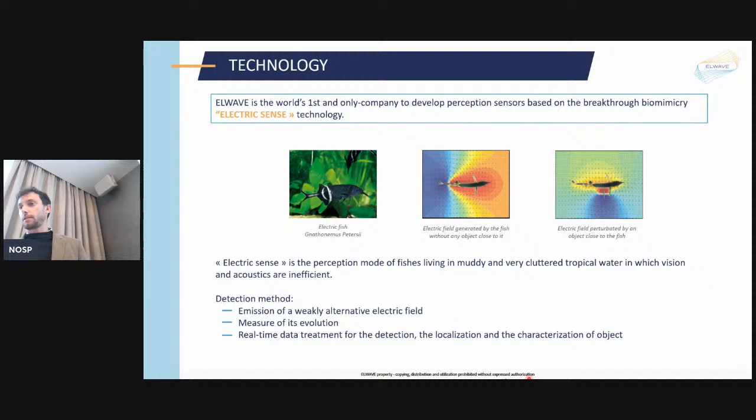So about the architecture of the product, how we are going to deploy it. I will show you the hardware and the software or algorithms that can do different things with the same hardware.

In terms of hardware, we have a first version, a 300 meter depth rating system that's going to be launched after summer. It's made of a pod with all the electronics and real-time processing of the signal, and some electrodes, up to 8 electrodes.

You see that the systems are quite compact and light, and really modular. You can put between 2 and 8 electrodes, depending on what you want to do. Here you have 3 connectors for serial, Ethernet, and external sensor connection.

Part of the important external sensors are conductivity temperature probes, because we compensate for variation of the environment. What we want to see is a variation of our signal due to a new object, not due to a change of the seawater salinity, for instance.

And on the other side, you have 8 subcon connectors to plug in your electrodes.

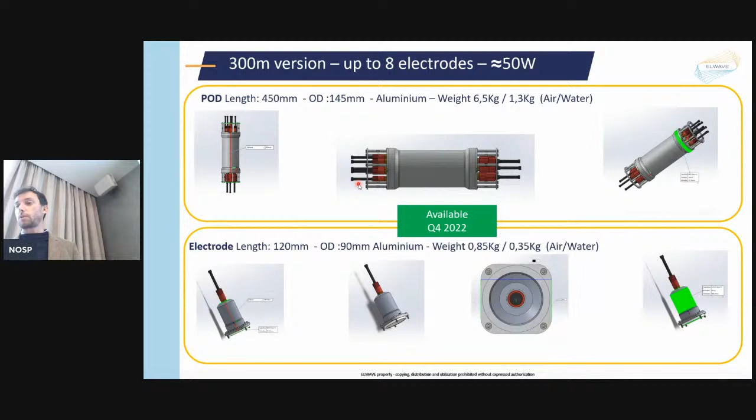A little bit later, we're going to launch also a 6,000 meter version. It's exactly the same electronics inside. We just changed the titanium housing and the connectors. Here you don't have 8 plugs, but 2 big plugs to connect 2 octopuses, so 2 times 8 electrodes, up to 16 electrodes to your hardware.

Software modules. The first one is what we call the safety shield. I was mentioning that it could be a complementary solution to your sonar or obstacle avoidance sonar.

The sonar is directional, the camera is directional. Sonar has a longer range than us, and the camera has more resolution, but we can provide omnidirectional detection, we make the bubble like the fish. So we provide an omnidirectional and instantaneous detection of the closed environment.

Just to give you an idea of the detection range, it depends on the spacing between the electrodes. So if I'm on an AUV of 5 meters long, the radius of the detection bubble in the water is 25 meters.

And this detection range will tend to reduce a little bit when it's inside the marine sediment. When you go closer to the seabed, you will see what is inside the seabed. But the main limitation of the technology is the detection range. We have designed the product to be compact and low power consumption, so you have no perfect sensor, it's just a compromise.

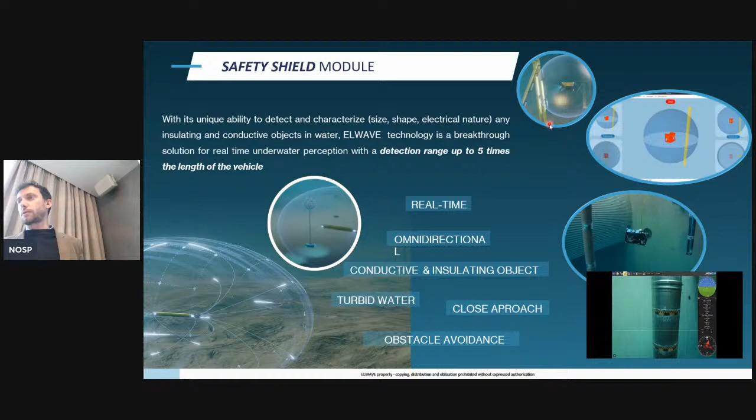Two other modules, so all these modules are software with algorithms in the background. Algorithms run in the pod, in the bottle, in real time. And afterward you have software on your own PC where you can visualize and configure your software and visualize the data.

One software will be deployed first for UXO. Basically, we'll do a resistivity chart. It's like a waterfall image from a side scan, same principle, but a resistivity chart. So you will be able to see insulated and conductive objects appearing on the chart.

If you compare that to magnetometers, they can only see ferrous targets. We don't care about the ferrous equivalent. We see any target which has a conductivity different than the environment.

So for us, the only object we will not see is one that has the same conductivity as the marine sediment or sand, if it's in the sand, or the same conductivity as the water, if it's in the water. That would be transparent. Otherwise, we'll see a gradient of color.

We'll have an upgrade of this module called UXO 2D, and then UXO 3D. If people want the size, shape, and depth of burial of the object, it will be possible. For the shape, it will be approximative. We develop models of the electric response of a sphere, a cylinder, an ellipsoid, a plane. That will help identify what type of mine or UXO is inside, and also give the conductivity. So for buried object identification, that will be very helpful.

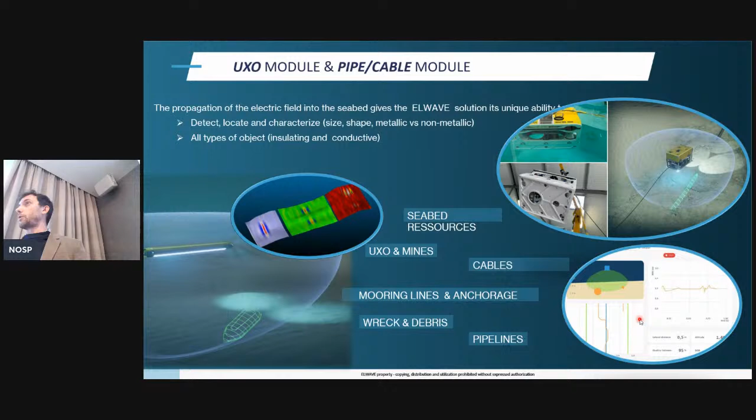In terms of visualization, it will be a simple lateral offset of your pipeline or cable, and logging the depth of burial. When you have an ROV, you can see this in real time, but you can also log the data from an AUV, and plan real-time automated tracking of your buried pipeline or buried cable.

Here are some examples of detection capabilities. We can see anything which has a different conductivity than the surrounding environment. Obviously, the more difference in conductivity with the environment, the easier it is to see. So it's easier to see a big metal object than a small plastic object. That's why, for instance, our signal does not penetrate the object—the object is either helping or slowing the signal.

For example, this type of fiber optic cable is perceived by us as a purely insulated material. We don't care about the copper inside, so it's difficult to see. That's why you probably need a fairly big vehicle to go quite close to the seabed to catch it when it's buried. But for a big pipeline, it's much easier.

This type of cable is very constraintful—you have plenty of umbilicals or even communication cables which are bigger. Here I really take the most constraintful example. This is something very interesting for offshore survey, UXO survey, and wind farms. Today, magnetometers struggle to find LMBs from World War II, like this German mine, because it's non-ferrous or almost non-ferrous. For us, it doesn't matter—it's just a big conductive object, so it's easy to catch, like the LMA, and we can also see modern mines like the Manta.

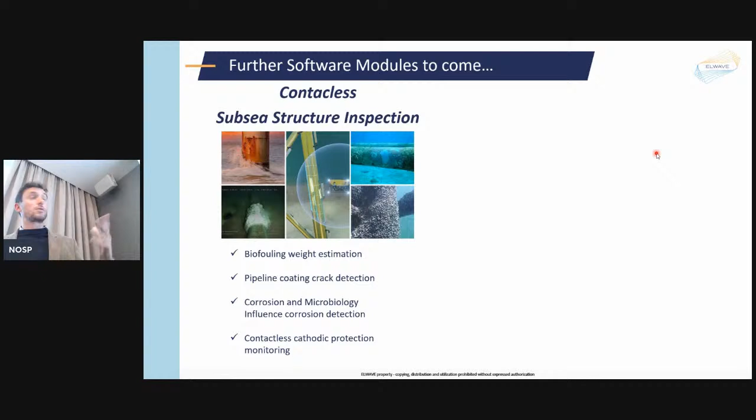That's the first potential. The second one we are working on, and here we have some good discussion with a very famous university from Norway that we will not mention now, is that we send a complex signal in the water, several frequencies. Each metal has a different conductivity, meaning each metal will give a different response to our signal.

And what we want to bring for deep sea mineral exploration is identification of the minerals in the sediment, saying this is more copper, this is more cobalt, and so on, without contact from an AUV. That reduces the need of sending an ROV to grab samples to be analyzed.

And also, as I told you, with the phase shift observation, the idea is also to detect life, because it's the second objective of deep sea mineral exploration—not just to find the metals, but also to see if the area is a habitat for life.

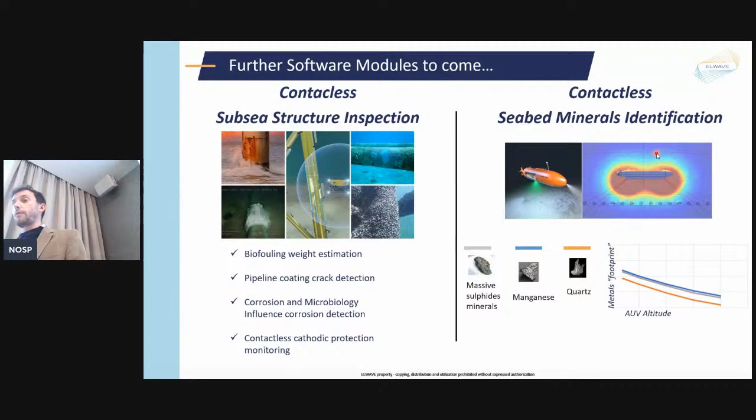Voilà, and to finish this presentation, say let's go subsea. So after summer, we are going to start some demos, and we'll be happy to do that with our friends here from Go Subsea, to help you see the performance of our system for cable laying, buried cable, buried pipelines, or UXO applications. Voilà, that's it for me. Thank you.

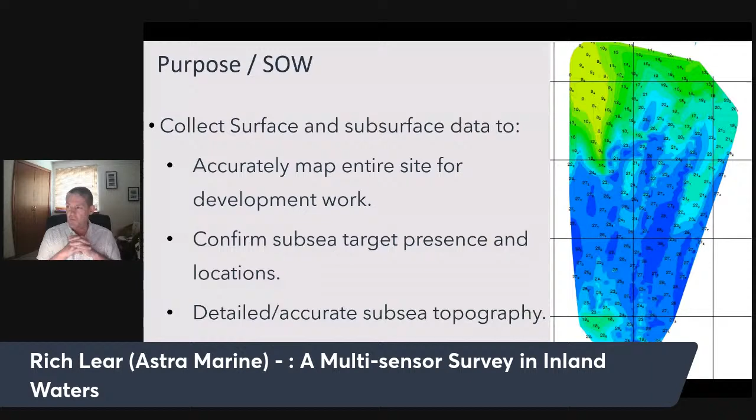The equipment that was used was a Norbit multi-beam, the WBMS system, a UAV with a camera, an ROV with normal cameras, and the Norbit LiDAR system that went along with the multi-beam.

We went with this arrangement specifically because, of course, a rib like this isn't very rigid, so we had to have a multi-beam with the motion sensor integrated into the bottom end and take out as much of the uncertainty that's involved with mounting this stuff onto a boat as possible.

We set up a number of control points before we started the surveys, because one of the challenges is we had to try and tie in the UAV data along with the LiDAR and then the multi-beam data.

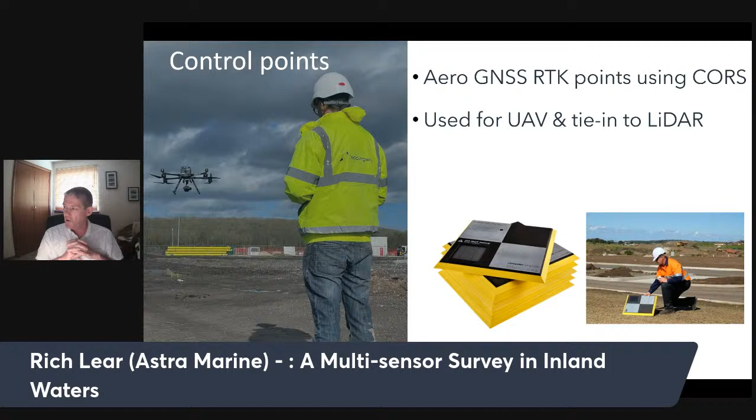The ROV crew, what we did is we carried out the survey first. We picked targets and then the ROV dived on them. Here's an example of some of the targets. I hope you can see those. You can see that they vary from sort of big aircraft. Some of you will recognize a Land Rover there, the nose of a helicopter. These are sort of military vehicles, a couple of boats, and one of the mines that are used for the military type training.

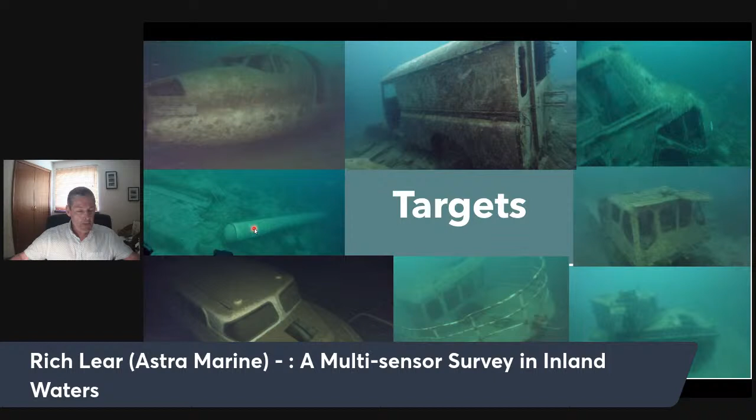So we did the surveys over a couple of days. We set up the control points, mobilized the multi-beam, and while we were doing that, the ROV guys were working in the shallow water areas. Then on the second day, we carried out all the main surveys.

Two main issues we found. This was my line plan, and this is what we actually did. The reason for that is there were a lot of obstructions in the water we weren't aware of - a lot of floating lines, debris right below the surface, and it was really quite difficult to operate around. So that was something of a challenge.

The other issue was the weather. This was taken on the day of the surveys, and you might look at that and think there's nothing wrong with it, and there isn't - unless you're trying to fly a UAV and get photogrammetry. This mist persisted for 2 or 3 days, unfortunately, which made it difficult. But having said that, we got our data, and that's the aim of the game here.

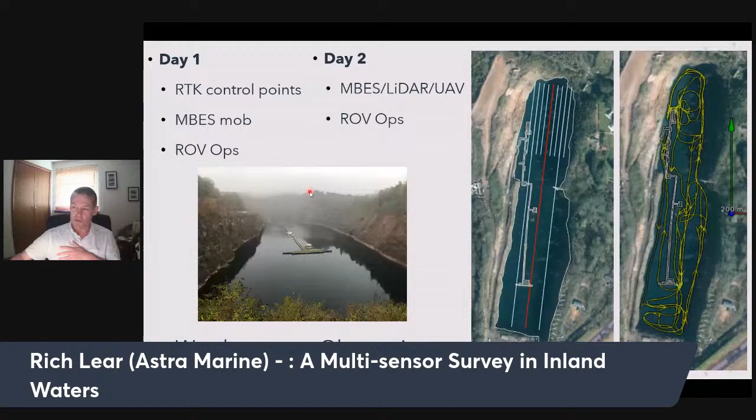So the data flow: we had the multi-beam set up along with the LiDAR, and because the multi-beam has an integrated position and attitude system, the multi-beam data is co-located with the LiDAR data, since it's all from the same reference point, or the same source.

We used software called KudaCore, which you may not have heard of before - it's a new EIVA piece of software that combines NaviPac and NaviScan into one package. That was used for data acquisition, Navi-Edit, Navi-Model, and then output as XYZ.

On the UAV side of things, the UAV collects photogrammetry. It has position and attitude information, and then Agisoft Metashape was used to extract photogrammetry points in LAS format, which is essentially an XYZ type of format.

Cloud Compare was used for processing the majority of the data. Cloud Compare is freeware, and it's very good. The great thing with Cloud Compare is there are lots of geeks around the world, and if you send a message on a forum asking if anyone knows how to do something, someone is sitting there and will answer you. People write modules for it all the time. It's actually a great open source piece of software that's very useful.

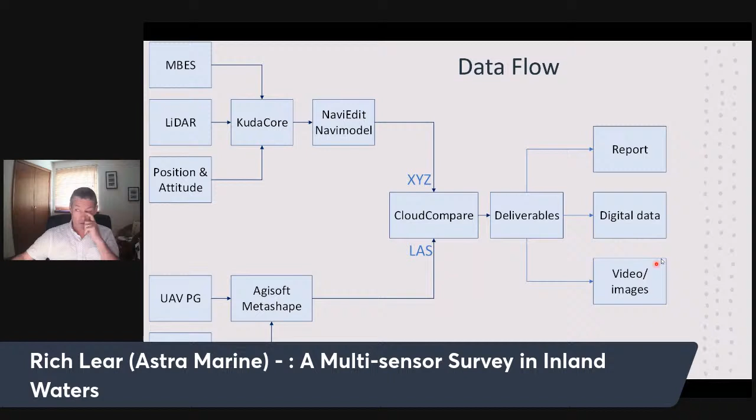So the data set looks like this - there's the multi-beam data in the middle with the photogrammetry from the UAV all around it. The UAV collected around a billion points, and when you add in 55 odd million from the multi-beam and another 55 million from the LiDAR, you soon realize the biggest challenge here is just the volume of data, nothing else.

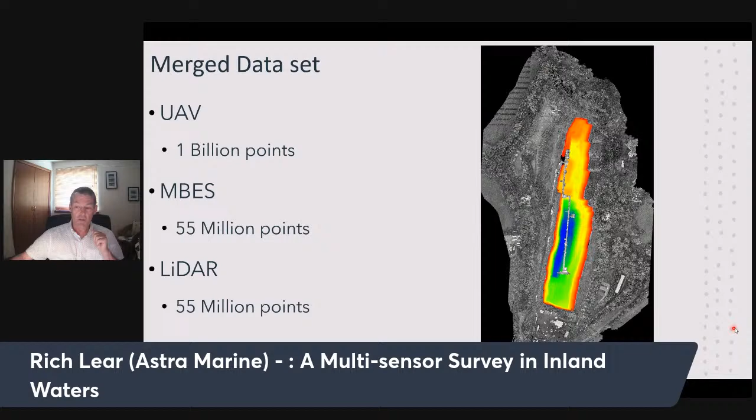If we look at some of the multi-beam data, this target you can see here is the BAE 146, a regional airliner - mostly out of service now - but you can judge the size of it there. That's what it looks like on the multi-beam. When you start looking at the resolution, in 30 meters of depth, we're seeing around 5 centimeters or so point spacing, and that was by multiple lines over the target. But that's the order of point spacing we saw.

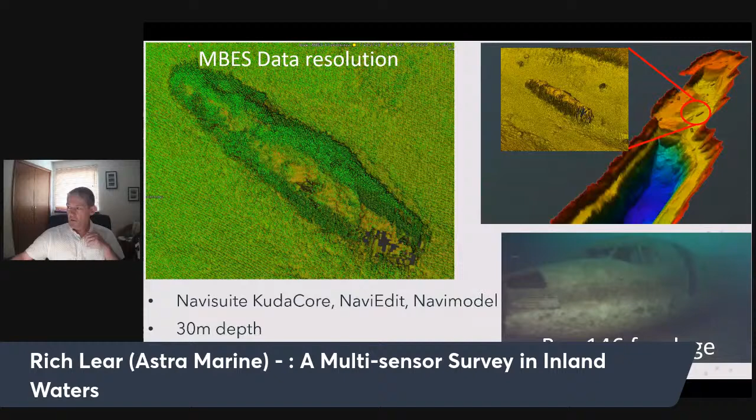The LiDAR, well, you can judge it yourself - this is the ROV guys, one of them sitting down looking at YouTube or something on his phone while the other one's working. But at the same sort of distance, between 10 to 40 meters, the point spacing is around a centimeter. Now, we didn't actually deliver the LiDAR data - all we used it for was to tie in the subsurface and surface data sets, because we needed to see common points in two data sets to merge them. And because the LiDAR uses the same navigation and attitude source as the multi-beam, we were able to tie those in quite nicely.

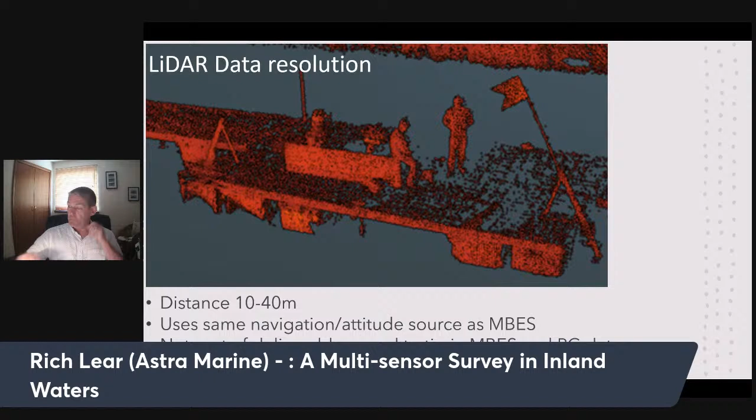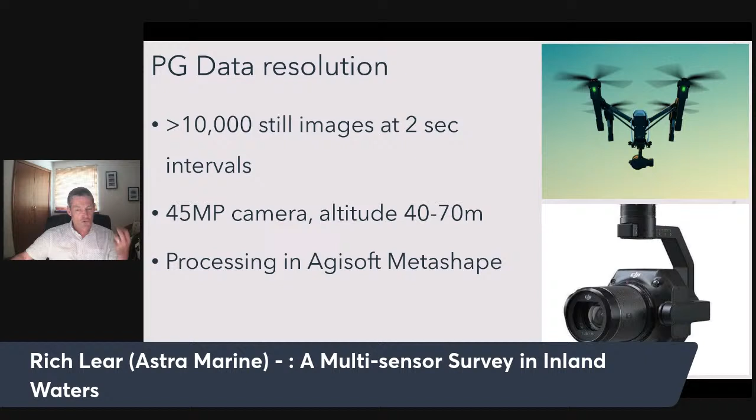If we look now at the photogrammetry data resolution, the UAV collected around 10,000 images at 2-second intervals. It has this very expensive 45 megapixel camera, and was typically operated at an altitude of 40 to 70 meters, depending on what they were looking for. The software was Agisoft Metashape, which essentially extracts points from the images, and as I mentioned, 1 billion points with point spacing of a few millimeters.

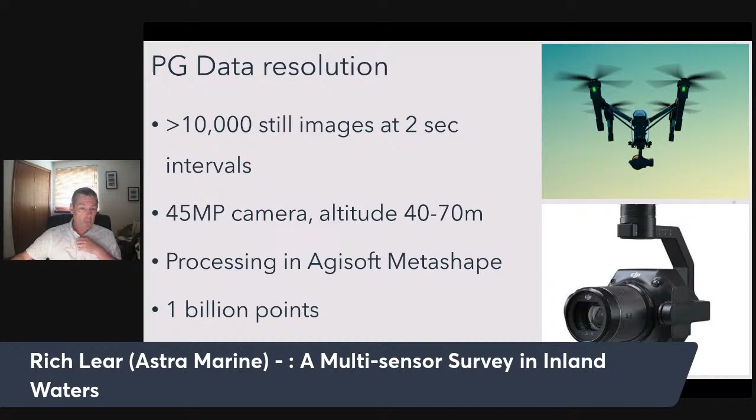I'll try and give you an idea of that. So this is an example of the photogrammetry. This is us mobilizing the boat. But you start to see here that you get this photograph-type image with points extracted from that. And it really is an excellent, excellent piece of kit.

So as you can imagine, with a project like this, there were some challenges and some upsides. The challenges: we found out only by chance that the water level in this quarry changes. There's an underground stream, and about 2 days after rainfall the water changes. That caused some consternation when we couldn't tie depths in together, but once we found out what was going on, we were able to sort that.

As I mentioned earlier, the volume of data is definitely the biggest issue with this type of survey. Just manipulating 1 billion points on a computer is not easy. Trying to merge those 3 data sets together took time. The way we did it in the end, we chopped it up into small chunks and used matching of small chunks, then applied that to all the data, and tweaked it from there.

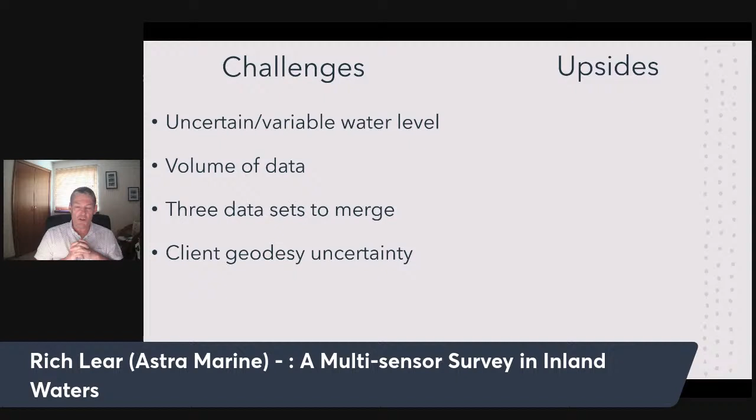On the upsides, having those common points between the multi-beam, the UAV, and the LiDAR data really eased that merging. It meant that I could quite simply move data sets as I needed them to match. The other upside was that the deliverables were quite simple - really it was a digital data output and a written report, and that was about it.

And the visibility was excellent. The ROV was able to get good images of all the targets, and it really made life easier that they were able to find those and operate around those easily. And we had great teamwork - it was a good team that operated, and we all worked together well and got it all done.

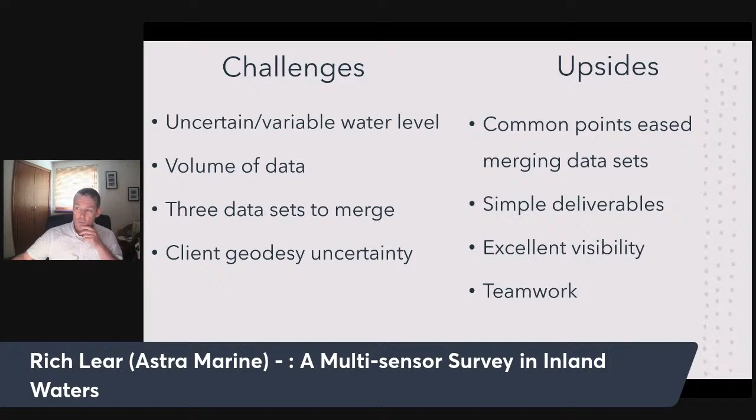Okay, now I'm going to challenge the bounds of technical possibilities here and try and show you some of the data. Can you see that viewer okay now? Well, okay, I hope you can see it. I'll try not to move this around too much because it's a little bit jerky.

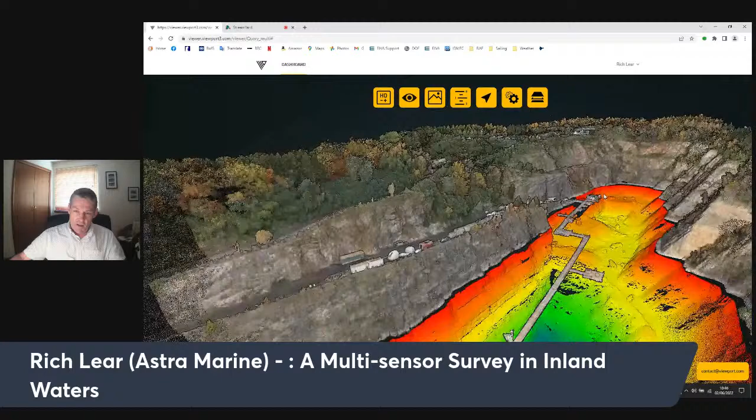So these areas you can see here, these are the floating pontoons around the west side of the area. So the multi-beam is the colored area here, and you can see from the shallow points - this is about 2 or 3 meters depth here - right down to the deepest point, 80 meters.

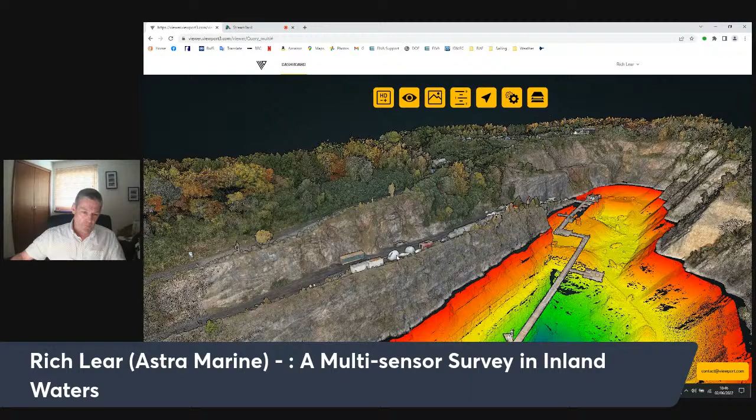I just wanted to show you a little bit about this photogrammetry, and if I zoom into a target here - if we just look at that container - that is made up of multiple UAV images. As the viewer starts to build up the points here, you'll start to see that the match between these multiple data sets is exceptionally good, really very little distortion at all.

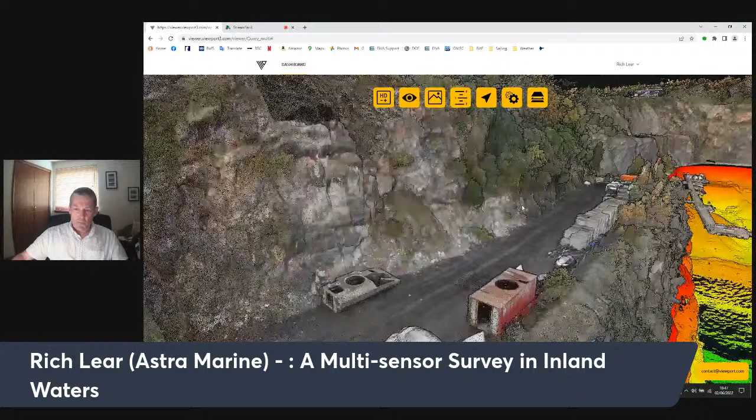I noticed something when I was looking at this afternoon. If I can show you here - we missed this in our QC, and I just saw it this afternoon - just need to let this image build a little bit.

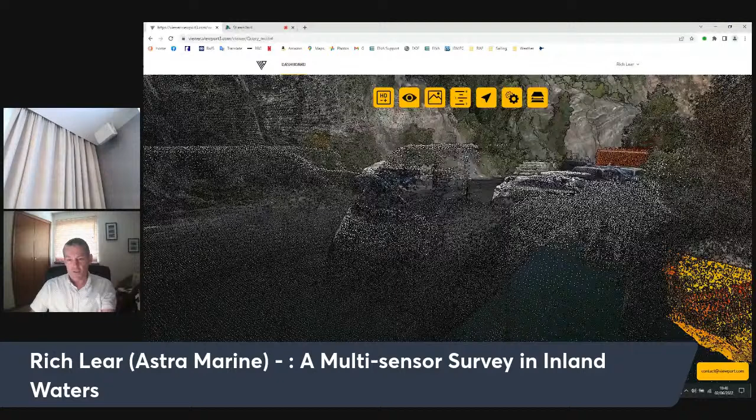So I hope you can see these are some cars parked in a car park, and over 2 separate days, of course, the people park their cars in slightly different places. And I notice over here we've got 2 cars at 90 degrees to each other, because someone parked their car in the same spot - one day facing in, the next day facing at 90 degrees. But it matches very well.

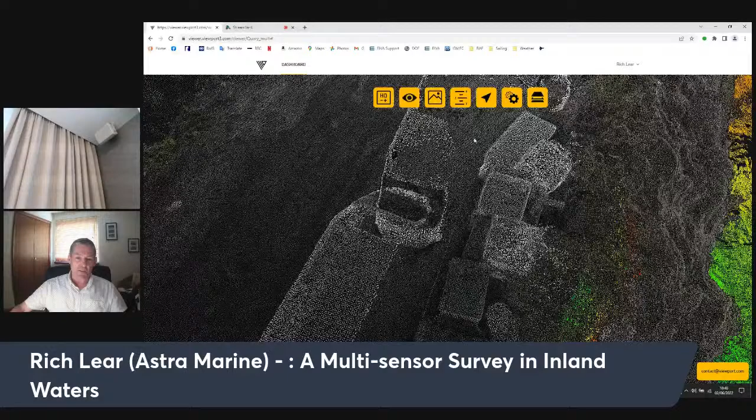You can see those 2 - that's where the 2 trucks were parked in different places on 2 different days. And again, that car parked in 2 different places. You see that the stationary target, the boat, matches very well, but this was just where the car was parked, and you see how it's 90 degrees out there.

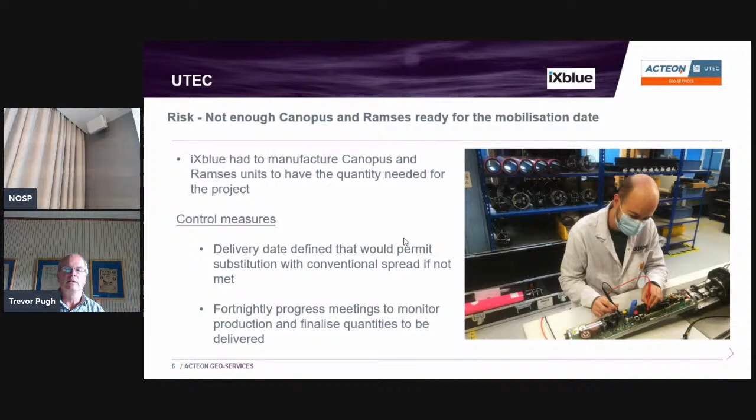So what happens if Canopus and Ramses weren't able to meet the requirements for the project? This was a typical deep water installation project, manifolds, flow lines, jumpers, a bit of metrology in there. We worked through the project with iXblue, defining what we would want Canopus and Ramses to do. Canopus are the transponders, Ramses is the control unit. So Canopus is like a Compatt, Ramses is like a ROVNav.

So iXblue had to change the priorities of their development program so that we'd be able to do what we wanted to do on the project. And then, of course, they had to prove it to us. It's no good just saying, yep, done that. So this was where they went offshore down at La Ciotat in the south of France to prove that the units could do what we wanted them to do.

Now, this was at the height of COVID, so it was very difficult to get anybody to the boat. So what they did was live stream the trials, cameras, computer displays, the whole piece, with two-way comms to everybody, so it was as if we were there. We were actually able to get one person there - one of our offshore surveyors lived in Switzerland and was able to get to the south of France to actually be on the boat. A lot more about that interaction shortly.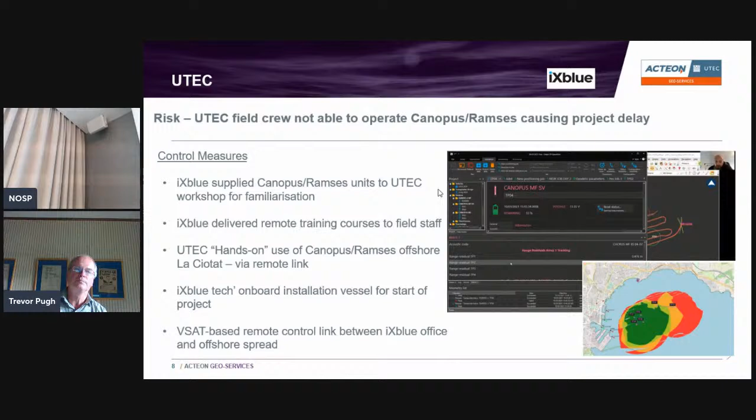Now this risk was, we'd trained the field crew, but the Canopus Ramses software just wasn't efficient. And therefore at 3 o'clock in the morning, field staff are struggling to make something happen efficiently. Now this was good feedback from the training. So we were putting all the field staff that were going on the job through the training course, and rather than just sitting passively receiving it, they were saying that's not very good, why doesn't it do it that way? And iXblue weren't saying tough, you get what you get - it was a case of, oh, that's a good idea, we'll modify the software, the user interface, to take your comments into account.

Now that wasn't just done randomly, it was a controlled process. You were playing with the software, so not only were you changing it, but they captured it through their quality system, then took it back offshore at La Ciotat in the south of France and demonstrated that the software changes had been done to the requirements of the field staff. That was a vital step - I'll come back to that.

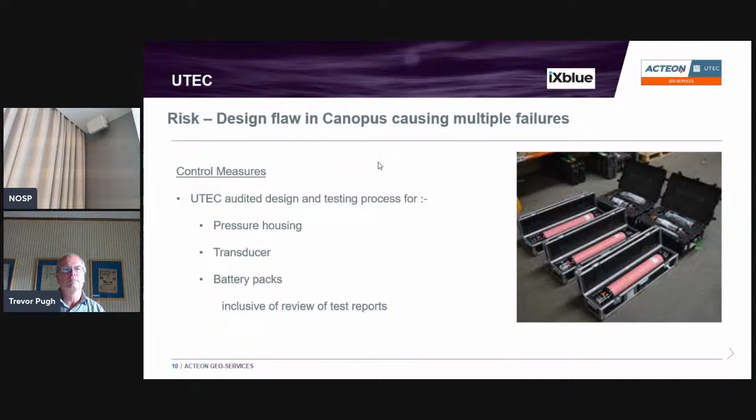Similarly, what happens if the manufacturing process was flawed, and they nipped some O-ring or something like that so that they flood? So again, we went and did an audit of the manufacturing and testing process.

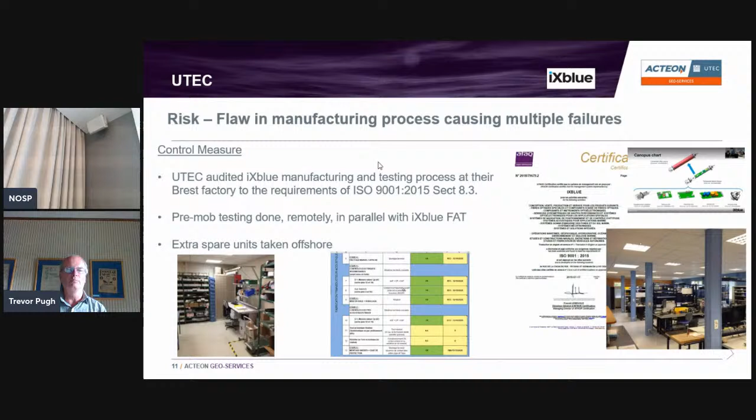This had to be done remotely, but with the iXblue QA system being online, the auditors, which included myself, were able to see the test process. We could drill down - who did that test, when was it done, what were the results - show me the results of every step of the way. So we could see that there was a very rigorous process for each transponder, each Ramses, convincing us that at each step of the manufacturing process, components had been tested and proved to be functional. But even so, we still took extra spare units offshore above and beyond the normal level of spares, because we didn't want the risk of failures leaving us short of equipment.

So there were some secondary lessons. Remote training is not as good as in-person training. People were struggling with their laptops being on different formats, different screen resolutions, and so on. There was also less interaction between the trainer and the trainees, and less interaction between the trainees during coffee breaks and everything. So instead of being able to say, did you understand that last bit, shall we ask them to do it again, they were just sort of on their own at home, with less interaction. Hopefully we're past that now and we'll be able to get back to in-person training, but it's a lesson learned that remote training isn't as good as in-person.

Field staff need hands-on familiarization with the hardware and the software. You can't do it all from a book - you need to be actually operating the software.

Another lesson, you can do quality audits remotely, especially when the quality system is all electronic. Remote control isn't something you just turn up and plug and play - there's all the firewalls and security issues, and you've got to engage between multiple IT departments to get remote control. But once it's working, although we didn't down-man on this particular project, I think we proved to ourselves, to iXblue, and to the client that remote control permits down-manning on future projects.

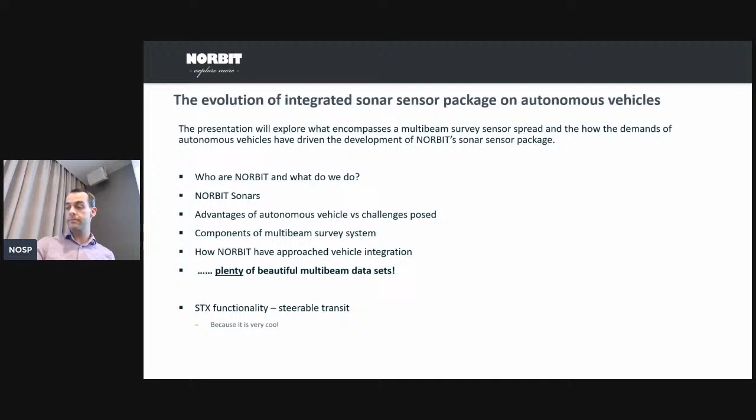No multi-beam presentation would be worth its salt if I didn't show you lots of beautiful images, so look forward to the oohing and aahing from the audience as we go along. If we have time and I don't mumble too long, I want to look at some of the STX functionality in some of our sonars, purely because it's cool and a nice application of our system.

So Norbit - who are we? We're a Norwegian company based up in Trondheim. We have three segments, or departments really: Oceans, which is where you'll find Norbit Subsea, and then ITS and PIR.

The ITS side is a vehicle or asset tracking system - Odd mentioned earlier he has a little tracker in his car produced by Norbit, so that's where that comes from. The PIR side is custom product innovation and in-house manufacturing. But the multi-beam side of things, which I want to talk about, is on the Oceans side.

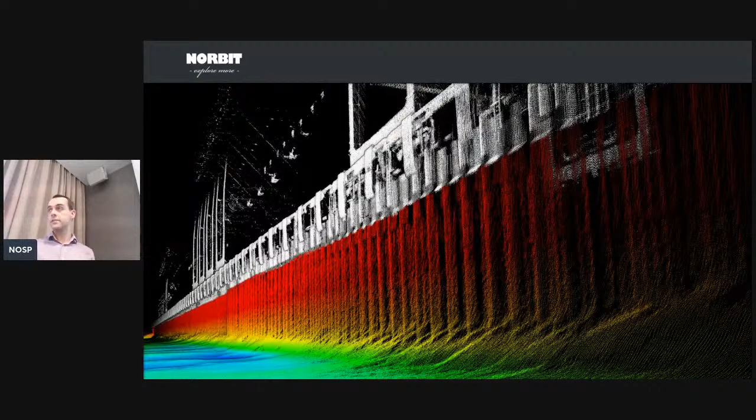So yeah, let's go there. Okay, there's the first beautiful image - some multi-beam data integrated with LiDAR. Rich did a nice job introducing some of our systems, so some of the concepts he was talking about earlier have stolen a bit of my thunder, but that's okay - it's nice to hear it from a client rather than an employee waffling on at the start. Here we've got some lovely quay walls from our WBMS system integrated with some LiDAR data.

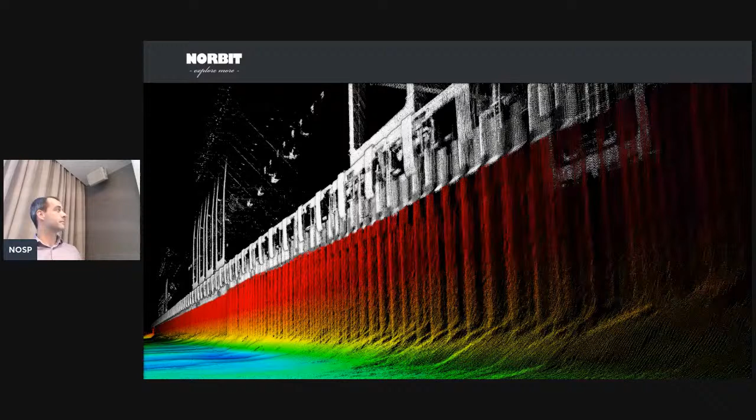Okay, so what are our products? In essence we've got two products: the WBMS and the Winghead. I think of these as the two main branches of our product tree, and underneath we've got plenty of little branches that cover every application of multi-beams. Each system can be used in any environment because we have a variety for that - be it a bathymetry system or a forward-looking sonar, you've got a WBMS or Winghead variant.

What else do we have? Different frequencies - we have the standard operating frequency of 200 to 700 kilohertz, and if you wanted a deep water system, we have a 100 kilohertz variety for extended range. Also, whether you're going to use the system on an ROV, a surface vessel, or an AUV, there's a variety for that.

So why the WBMS? Well, it's incredibly compact - both of these systems are incredibly compact. This is our workhorse, the original product we had in our multi-beam range.

It's probably the most compact and certainly one of the lightest and most high performance systems out there. It's only about 8.5 kilos in the air, and for the sonar itself, it's only 40 watts power usage, so it's an incredibly high performance, but small and compact system. We'll come on to this a bit later, but it's fully integrated, so we can have a sound velocity sensor and an INS potentially integrated with it, inside it.

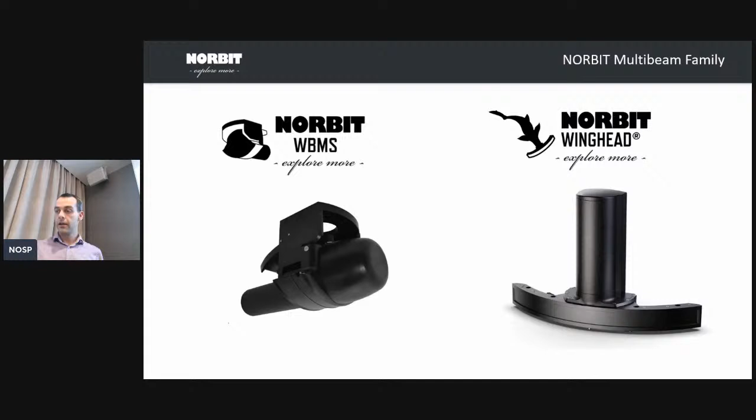You'll notice that both of our systems are curved arrays. You'd say that maybe traditional multi-beam systems have either a flat array or a curved array. We utilized curved array technology, and one of the real nice advantages of that is that it gives us much wider coverage. So without having to tilt the head, we can look up to 180 degrees, up to 210 degrees. So we can look above where the sonar is situated, orientated, without having to physically rotate the sonar.

Because of the curvature, we have less beam steering than a flat array. So we're able to split up the sonar into individual sectors so that we don't have to steer the beams to produce the wide coverage we get there. And then because of that lack of beam steering, because we don't need to do it, there's a much reduced sensitivity to any sound speed errors or variation of the surface. So that's a nice advantage from that.

It's highly portable and conforms well to all vessel types, so it's quite hydrodynamic already, so you can have a nice quiet system for that. And then all of our systems have got a sound velocity sensor integrated into the sonar head - you can just about make it out here, this is where the sound velocity sensor goes. So there's no need to have an external sound velocity probe.

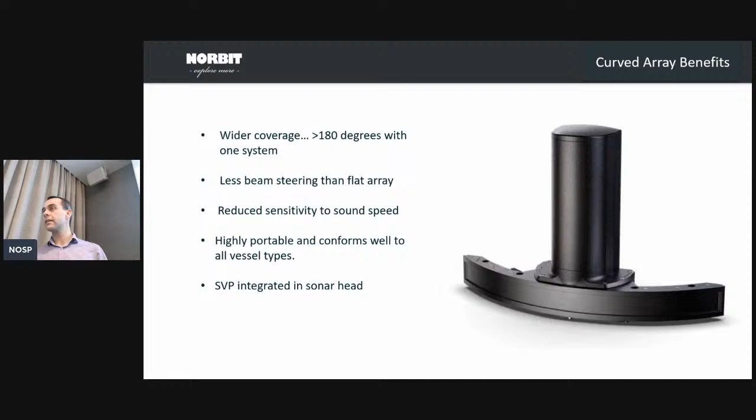I forgot to mention on the previous slide that both of the systems have only got one cable. So we have one cable to come up taking all the multi-beam data and the sound velocity. And if you do have an integrated INS in there, then that brings up all the INS data as well. It sounds almost trivial just having the one cable, but when you're talking about putting these on small vehicles and stuff like that, not having to mess around with multiple cables is a real nice advantage of this system.

Okay, so this was the system, kind of the big boy really in terms of performance, not in terms of size. This is the Winghead i80s. So this is our latest, greatest system that was released at Oceanology this year. It's a Winghead variant, 1024 true beams produced by the system, with a 0.5 degree opening angle.

It comes with a fully integrated GNSS INS system and is fully motion stabilized. That's pitch, obviously roll because that's what you'd expect now, but pitch stabilized in the transmit and yaw stabilized as well. In terms of this package, it's a pretty unique system to the market, and it's highly portable and can be used on all sorts of vessel types. Still high performance, the big daddy, but it's only 9 kilos with the wet end and the IMU.

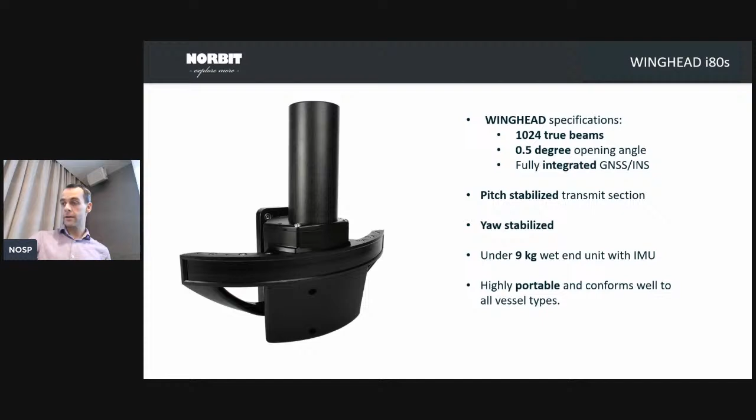Okay, so that's done my spec sheet review for now. So we'll have a look at some more pretty pictures.

So this is an ASV from XOCEAN. And I like this picture because I think it's looking at maybe what the future is for unmanned surveys and renewables. I think this is where we're all going to be ending up.

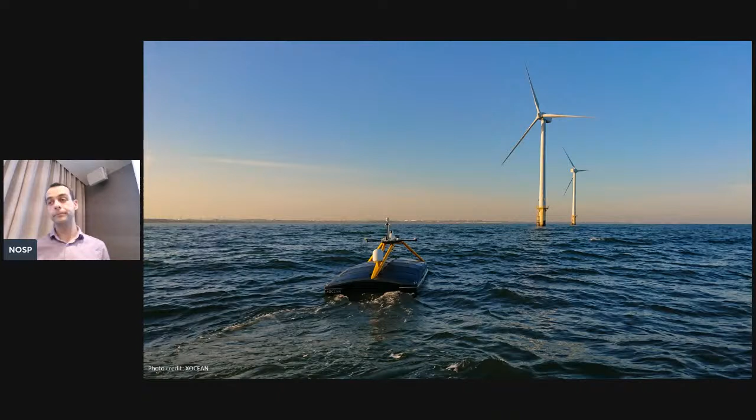So I'll try and use autonomous vehicles to phrase the rest of the presentation and how some of our features have been developed by the use of this. So why autonomous vehicles? Well, they're probably, in essence, the perfect survey platform. They're purpose built and designed around the survey package, so they're quite rigid.

The offsets are generally pretty small because the vehicles are small themselves. They're very quiet. And from a manufacturer and supplier of multi-beam stuff, it's scalable. You can use them as a force multiplier, so you can throw 3, 4, 5 of them out at a job, and the productivity from that is going to be pretty incredible. And then the obvious benefits in the reductions in any environmental impact, the reduction in costs.

And then probably the main one, there's no people on board. You don't have a massive crew. You're not putting anyone in harm's way or anything like that.

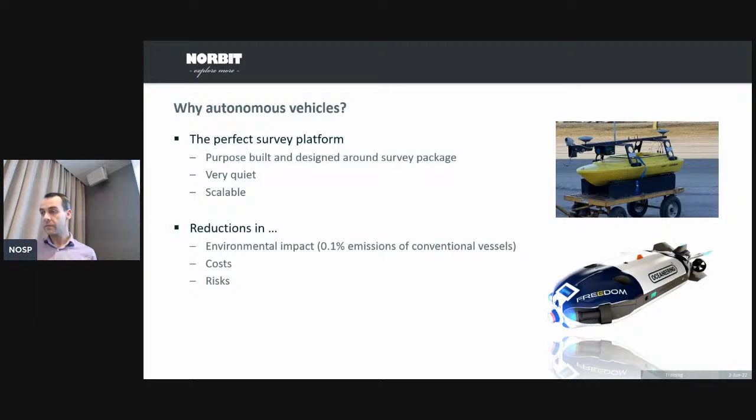But they do pose some challenges for a multi-beam manufacturer. Firstly, they're generally pretty small, so we need to take that into account. Remote operations - there's no one on board, so how do you control the sonar? How do you control the survey, the acquisition, that software package?

The range - these vehicles want to be out for a long, long time, so the power requirements of any system on board needs to be small. And motion - this is probably the most interesting one for the presentation coming up later. Anyone who's been on a small vehicle or vessel will know that they can bob around like a corkscrew in the water. That has an impact upon the motion, which can be quite significant, and that impacts your sounding density. So talking about your along track sounding density as we go along, we've got some very demanding client specifications now, so we need to work out a way to make sure our sounding density is predictable - we know exactly what we're going to get before we go out.

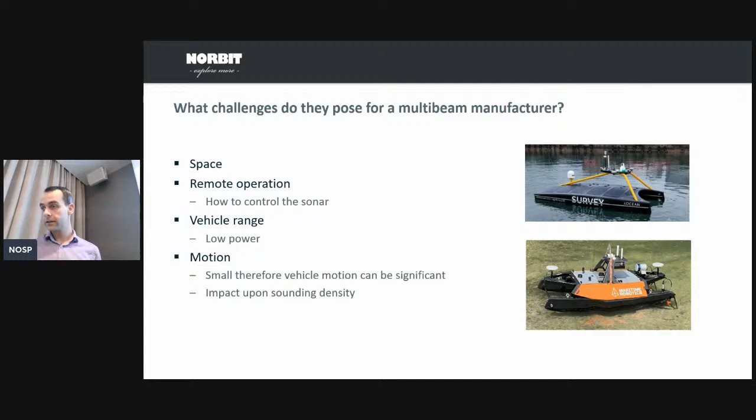Okay, so Norbit's approach then. We've got a small footprint - the thing, as I said, is very small, low power, and then we have this tightly integrated INS. I'm going to focus the rest of this more on surface vessels, vehicles, so that's where the GNSS INS system is obviously going to be applicable.

We have a simplified data collection tool, which we call the DCT, the data collection tool - basically hands-off operation. And then the real cool stuff coming up here is this full motion stabilization for something we like to call predictable density, so you kind of know what you're going to get. I've got some nice slides on that later. And then another cool thing, the dual swath, but we'll come to that in a minute.

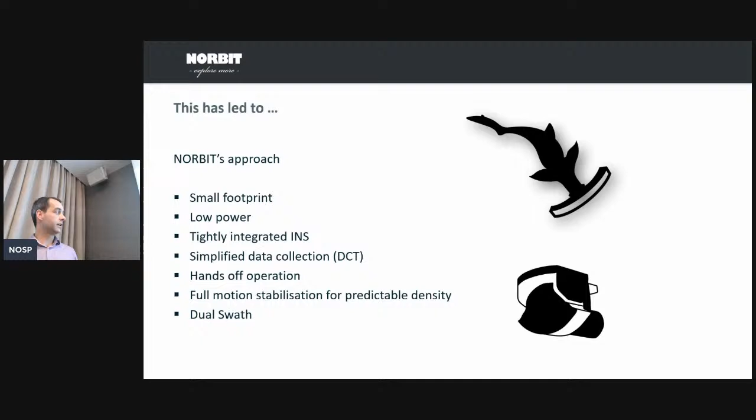Okay, so here's just another, I'd like to throw in some nice bits of data here. So what makes a surface hydrographic system? Here's everything that we need to get it done. You've got your laptop or PC for collecting your data, your multi-beam, positioning system, attitude, and a couple of sound velocity probes, one for the profile and the other for the corrections at the head, and then your software.

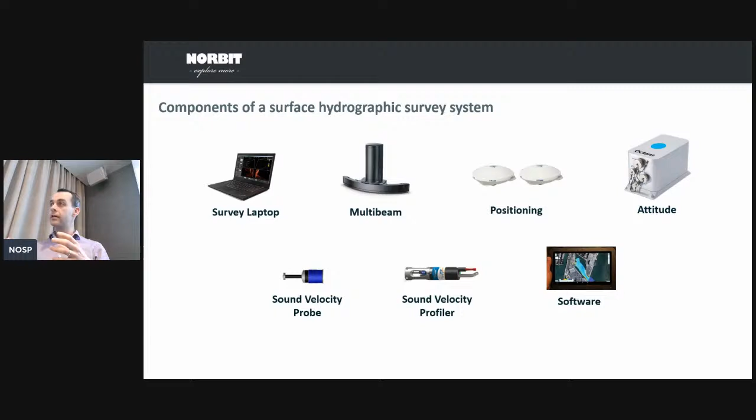And one thing that in my previous role, at another multi-beam manufacturer, and also similarly with ROVs and stuff like that - it's never really the multi-beam that has the problem. It's usually other sensors that are interfaced into it that generally cause those horrendous artifacts you see through your multi-beam data sometimes. So the way that we've approached this here is to try and integrate as much as we can into the multi-beam itself in terms of software and hardware.

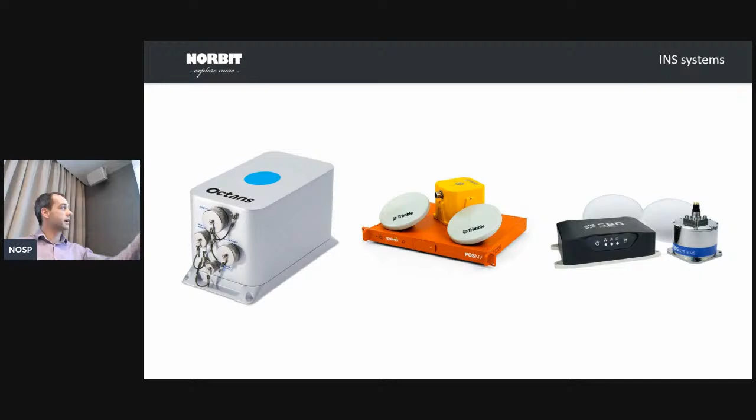So here we've got a couple of INS systems, a bit out of order now: the Octans, the Applanix POS MV, and the SBG units on the end there.

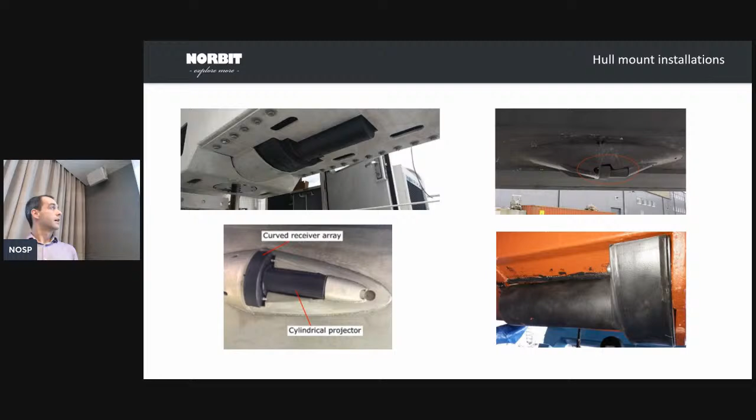So just looking at the installation side of things, this is probably how we used to do it. Looking at the evolution of a multi-beam setup, we've got some examples of hull mounts here.

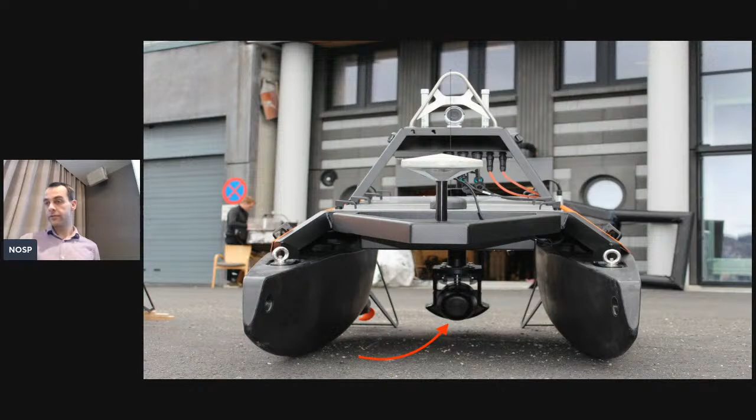Here we have a few examples of some USVs. I'll just jump through a couple of these. Here's a nice example of a marine robotics vehicle, with the multi-beam sonar stuck on the bottom there.

Okay, this is the slide I was after, in terms of the INS integration. We've got our Winghead here, the numbers are the names we give to the products. So we've got the Winghead, and we've added an Applanix POS MV, and all that has then integrated into what we refer to as the i77, or could even be the i80s.

So all the boards from the Applanix topside have gone inside our sonar control system, and the IMU is now integrated in the head. We've taken control of it all, basically, it's all one cable. Everything's really nice and simple in that.

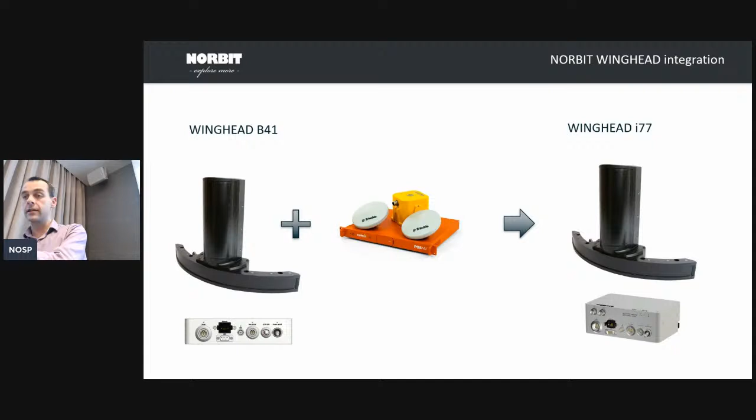But not only do we take control of the hardware and integrate it that way, we've also done the software as well. So the control software for your POS MV in this case is now integrated inside the Norbit GUI, inside the control software for the sonar. There's also an incredibly handy wizard that steps you through where to put your offsets, measure from this bit to this bit, how to do your GAMS.

Like I was saying before, my previous experience is that a lot of the problems we have with multi-beam setups are because the auxiliary systems are not correct. Whereas here, we almost try to take control of that and make it as easy as possible for the user to do it.

So that's the whole tightly integrated side of the INS, hardware and software done. And I mentioned previously that we have the sound velocity sensor integrated directly into the sonar. So just the one cable brings up your INS data, your sound velocity data, and your multi-beam data as well, which is pretty cool in itself.

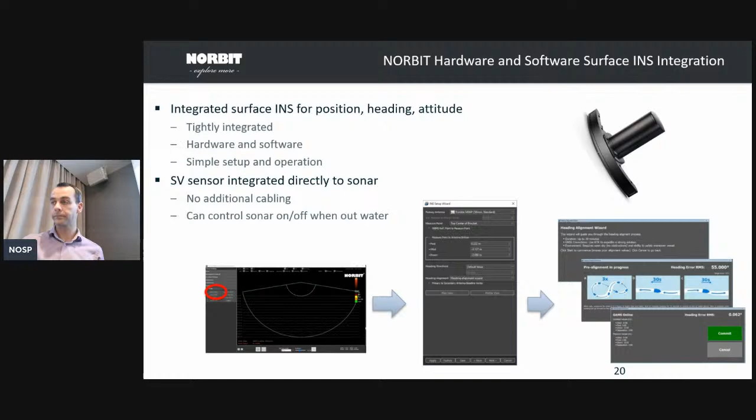Okay, the DCT, this is our survey data acquisition utility, designed to really simplify standard survey operations. This collects and takes all the data from the POS MV, takes all the multi-beam data, interfaces that all together, corrects it all, and then it's basically a logger at that point. It logs standard S7K files, which can be loaded into any post-processing package, and you get a nice graphical live DTM map there.

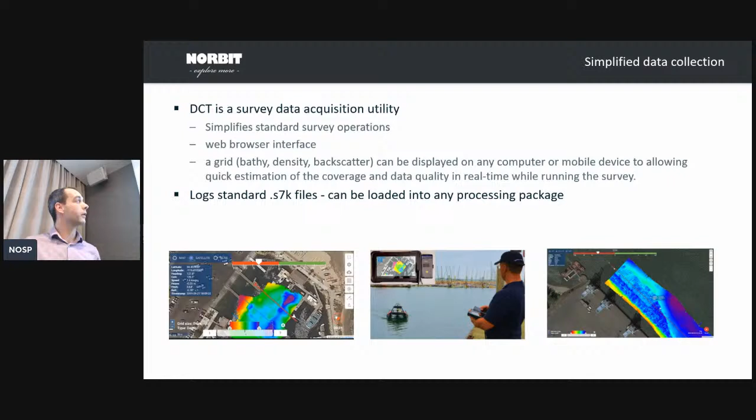One of the nice things behind this is that it's all web-based, so this can be run on your iPad or any platform that you can connect to the network via. That's a pretty cool functionality there.

Okay, on to some more pretty pictures here. Not only do we do multi-beam bathymetry, but there's also backscatter as well, as you would expect from a high-performance system.

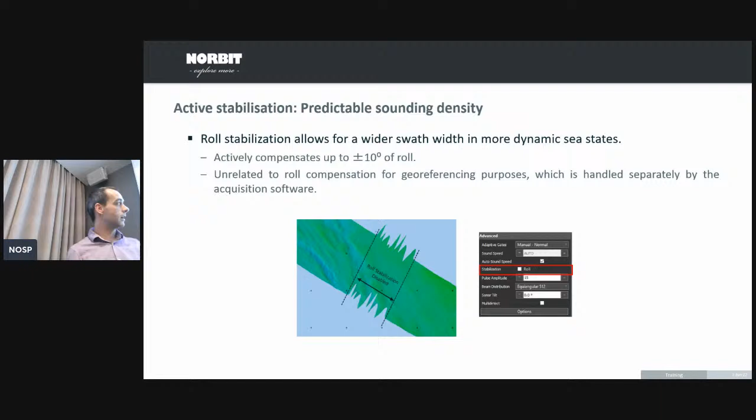On to a bit more about the active stabilization. I imagine all of you are aware of roll stabilization. If the vehicle rolls 10 degrees this way, then we tell the sonar to look 10 degrees the other way, thus flattening out the swath, so we get a nice even swath width.

Where it starts to get cool now is pitch stabilization. If the vehicle pitches up 5 degrees, then we can tell the transmit portion to actually ping 5 degrees behind, so we're still pinging down. That's pretty cool as well.

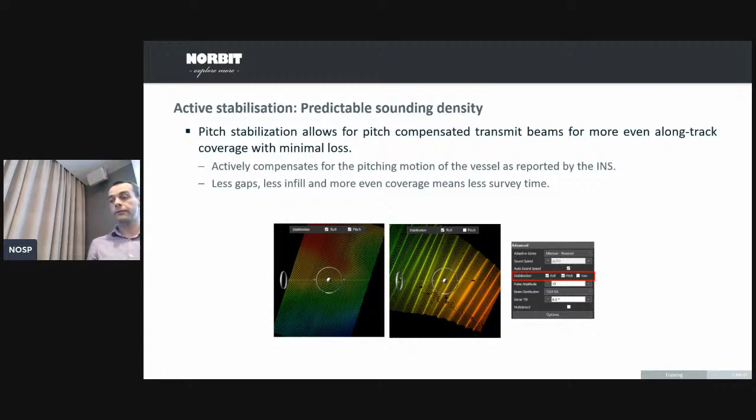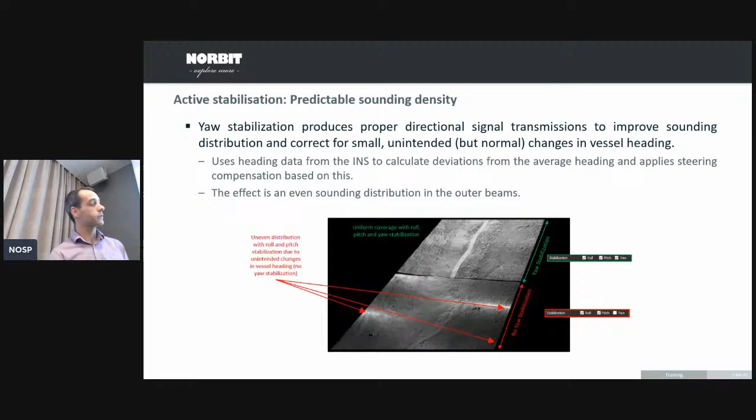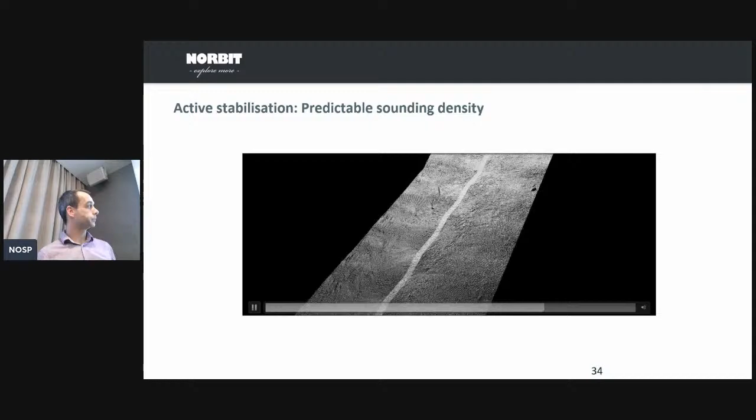I've got a nice little video to show you how this works. Here you can see this is without the yaw stabilization on - you can see these high and low density sections. This is where we turn it on, and now we've got this lovely smooth sounding density - a predictable sounding density. You know what you're going to get as you're going, because we're now fully motion compensated.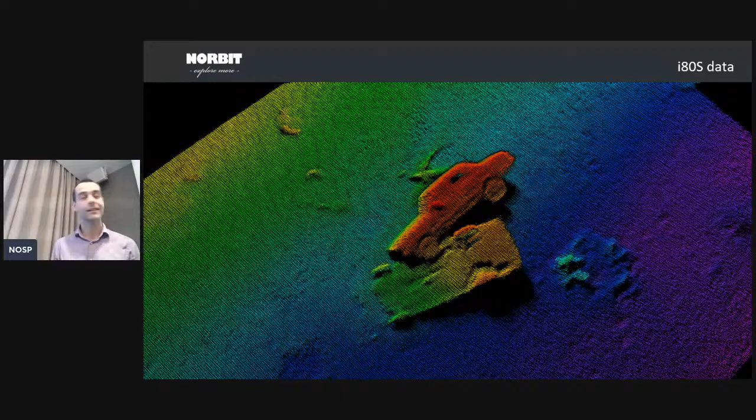Okay, and then just to finish off, I want to briefly mention dual swath. Dual swath is where we transmit multiple pings - in layman's terms, this doubles your sounding density because we basically have two swaths in the water at the same time. So in essence we're doubling our along-track density. The nice effect of that is that, because we're doubling the along-track density, potentially if we're hitting our requirement at that point, we can then double our survey speed.

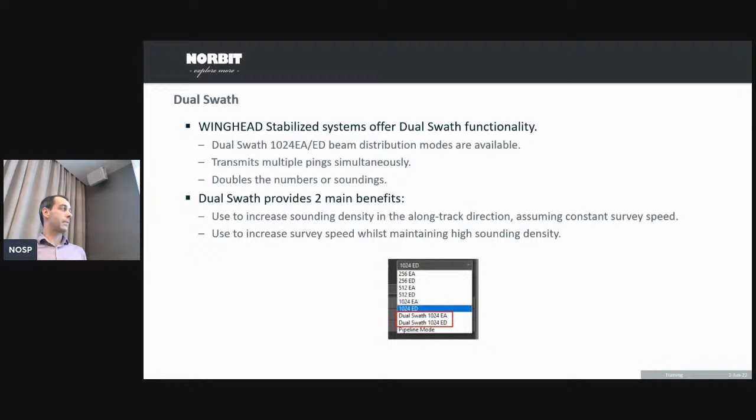So this is a really nice functionality that will, in essence, either make sure we can hit these requirements, or we can survey faster - survey faster, take less time. Everyone's a winner.

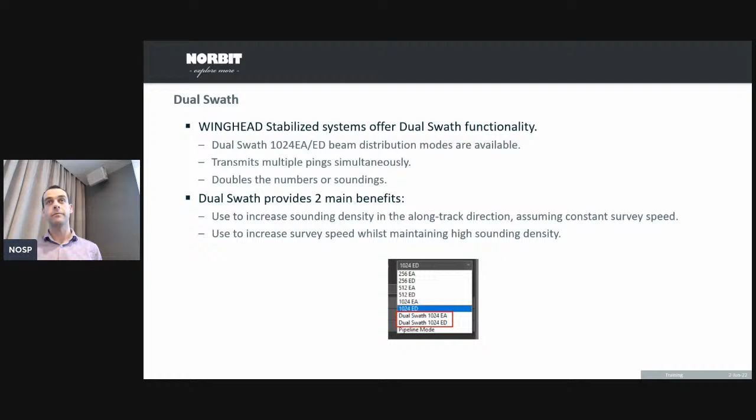Okay, just to rattle through a bit more here. Some more multi-beam data. I'll do this very quickly since I'm butting up against the time. This is the stuff I find really cool.

This is an interesting application of our steerable transmitter. It's how we do our pitch stabilization too. What we're able to do here is not just ping directly beneath the multi-beam, but scan - we ping at 10 degrees forward and then all the way along. So instead of just one ping in that direction, you get this scanning sector as you're going along, which is pretty cool.

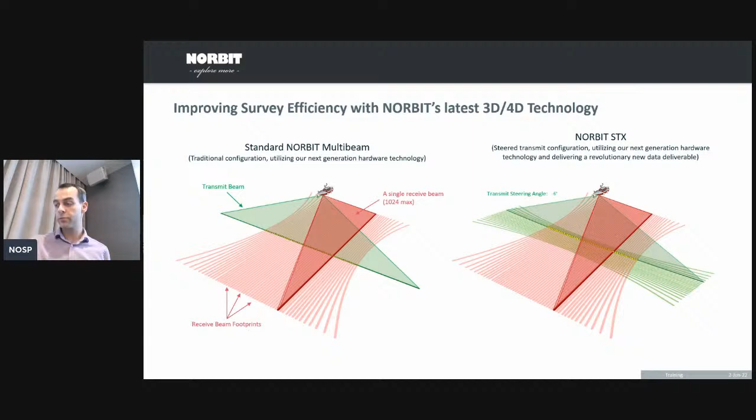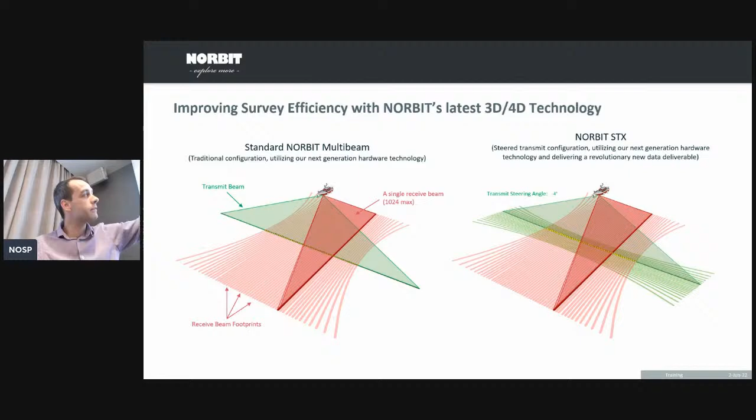And what that means is we're almost able to see behind things because we're not just pinging directly against it. In this case, we're pinging from this point and we're not able to see behind this pillar. But if you remember how it looked, it's got this little curvature to it, so that means you can almost see behind walls now. We can fill the gaps in behind the structures. This is an underappreciated functionality we've had in our systems for quite a while - this is scanning mode.

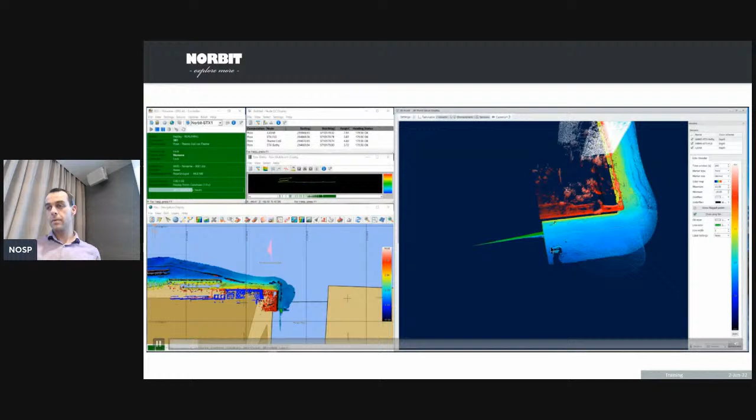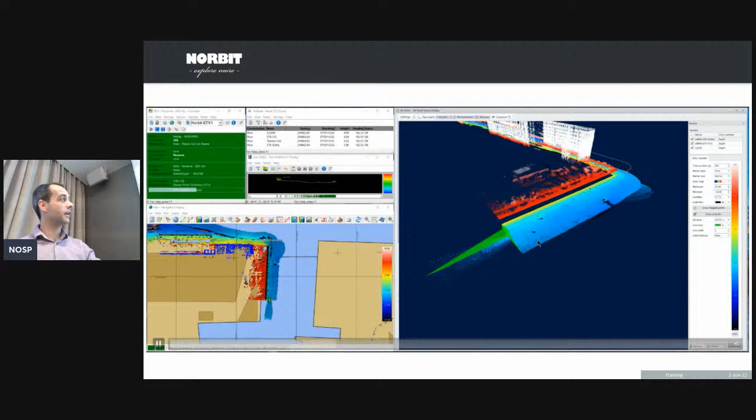One of the last things before we've just got some pretty pictures left - this is the STX node mounted on a vehicle that's now looking forward. I've got essentially three systems on here: our multi-beam mounted normally, LiDAR data, and this STX system looking forward and scanning as we go. So it's almost like it's seeing in front of it - we're using it as an object avoidance system, getting bathymetry scanning out in front of the vehicle.

Yeah, I think this is a cool way to visualize this kind of thing.

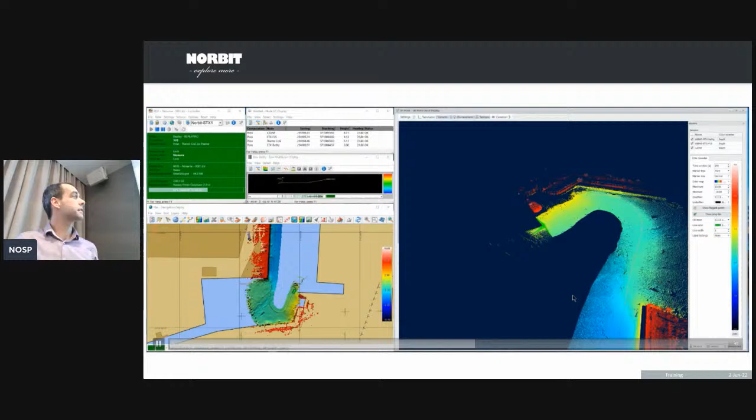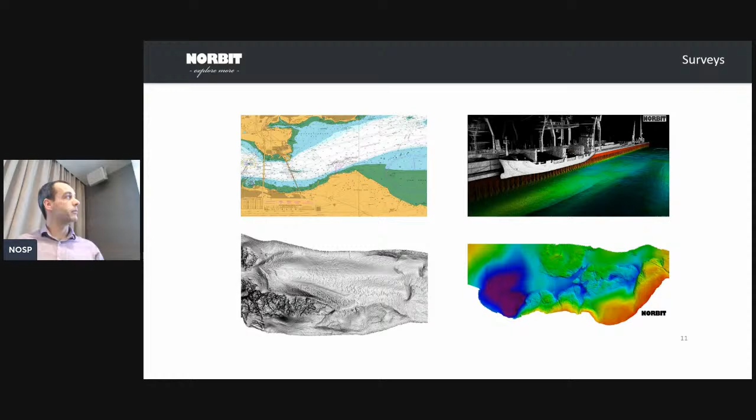Okay, final few pretty pictures. I've got a lovely video coming up of a wreck, so you can keep oohing and ahhing as we go through here. Here we go - I love this one, it's a bit jumpy, it looks better on this screen. This is the wreck off Oban on the west coast of Scotland, but it's just the level of detail we're getting with the system is fantastic. So lovely.

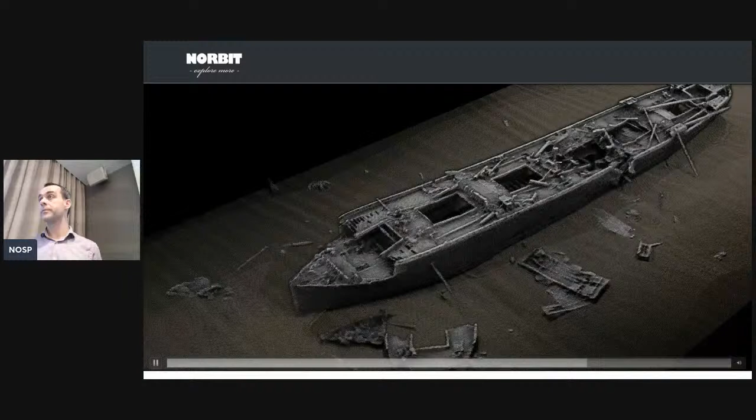The depth on this one is about 20 to 30 meters, something like that. Yes, this was from a surface vessel. And the editing was done in Qinsy, but this part is all produced in Cloud Compare.

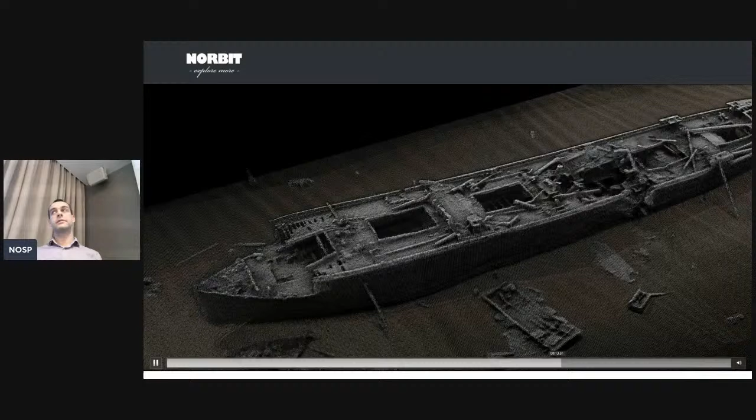What is the depth range of the H80? Still like 160, 70, 80? Yeah, because it's the same - there is for that system, yes, because it's 200 to 700 kilohertz, but optimal is 400 kilohertz, so you'd be looking at 120 meters, something like that. And then there's a 100 kilohertz variety with a different product - then you're talking about another unit.

Okay, and then the last few pretty pictures. I love it with the multi-beam data combined with the laser scanner stuff - it just really looks great, doesn't it?

Okay, any other questions? Yeah, is there any downside for the motion compensation? I'd be curious when you show, for example, the DTM with the roll compensated or not - I'd be curious to check both. Is there any motion or sound velocity residual? Do they affect more the pings which are compensated for motion, for instance, or is it negligible?

It's a good question, not one I've really thought about before, because I think the benefits are massive, especially with the roll compensation - you saw that in terms of your survey coverage, you're massively reducing or increasing your overlap required. I guess if you're steering a bit more, maybe there's a degradation of your beam widths if you go out further, but with a curved array you're not really affected the same way as with a flat array, so probably not. I think the benefits of motion stabilization far outweigh any potential issues like that.